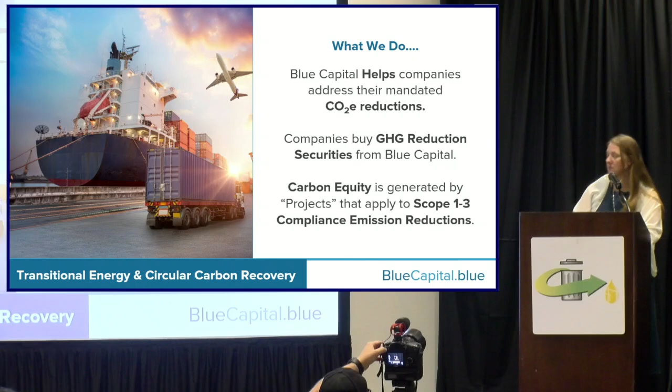So I wanted to start with an overview of the area. I wanted to talk about what is plastic circularity—it's when plastic products are renewed or regenerated, not wasted, so not going to landfill. And what is a circular plastic economy? Well, if a plastic product is used, recycled, or reused in a way that allows it to go back into a new life cycle or supply chain, once again, not into landfill or the ocean.

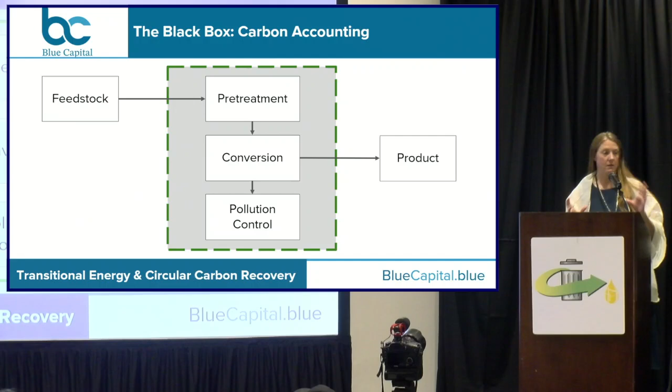And so what many of us—I've heard quite a lot—call the big black box that we talk about for carbon accounting or mass balance accounting. We have this overgeneralized simplicity that means we have a feedstock going in, a pretreatment system, conversion that creates a product, and some pollution control. But it's a very simplistic idea of what carbon accounting is and what circularity really means.

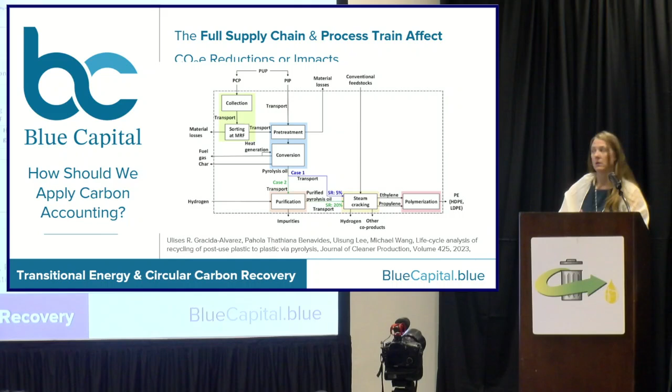So here's a paper that was put out in 2023, and I'm using it as an example of how, while you can make it less simplified, you still have an overarching problem of really addressing the industry as a whole. The reason is because every single LCA is different based on site, technology, process train, feedstock, and products coming out. It's all a different accounting system. So putting everything into a black box, or saying the industry makes this reduction as a whole, or this particular technology makes this reduction, makes no sense at all. We have to create authenticity in our accounting so that we don't misconstrue what the data is actually telling us.

So this is a very simplified example of this. If we take the initial idea of, how are we going to make decisions in developing our carbon accounting basis, we think about what products we'd like to have. We could have plastic as an end product, fuels, fuel additives, or electricity. Then we look at simplified steps of where we get our feedstock, what that feedstock is, how we're going to deal with it, and what conversion steps get us to the different products.

So just thinking about it from an energy in, energy out, mass balance approach. If we're looking at MSW, it takes a lot of sorting and stringent manufacturing to get that feedstock into a form usable by conversion technologies. So we see a lot of people using post-consumer industrial plastics, which is a really good fit for reducing some of that MSW conversion process.

In this model, your fuel additives, fuels, and plastics all need a recycling system, so they need an MRF. The reason is because to get to those products, they have very stringent restrictions—most need under 5% contamination on that feedstock. So there's a lot of work at the MRF to make sure the polymer you're working with has been sorted and cleaned appropriately for the process. It can't have salts on it, for instance.

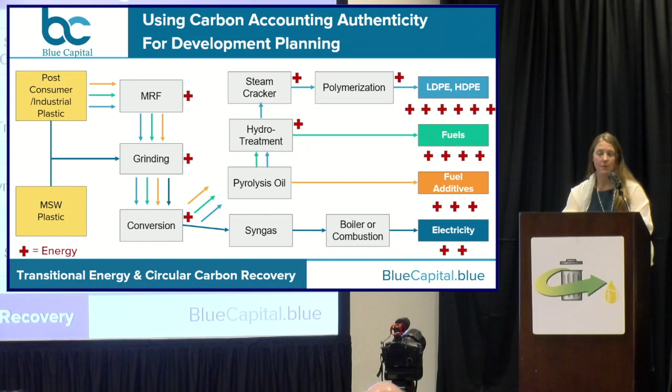So I take it from every step. You have your MRF, everybody has grinding that needs to happen in this scenario, conversion of some kind, whatever that conversion is. Then I looked at, just from your mass balance, very basic, what has the most energy going out and what has the least, and what's going to be your best return on investment from a mass balance energy perspective.

So creating authentic accounting, I think, can only happen through isolating mass balance carbon accounting for every step in your process, which includes waste input materials, feedstock import, end products, process train efficiencies, project site placement, embodied carbon, sustainable landscaping—which is often left out of the equation unless you're in California—and export of product.

So this is just an example of project infrastructure for a conversion system. Looking at it from a mass balance standpoint, looking at the energies going in, and the efficiencies that can go through the system. How do you create more energy inputs that have more sustainability impacts to them, like solar?

How do you use less on your utilities, like water, by putting in things like RO systems or other water recycling systems? How are you looking at air filtration and pollution control? All of these go into accounting mechanisms and should not be in a black box. All of these have value. Every single step of this has value.

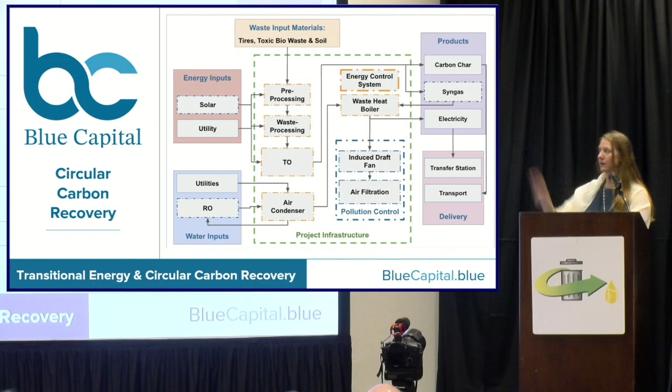So then we take a look at a project site, and we're like, okay, here's the project infrastructure. Well, what if we add into this living regenerative restoration, which is looking at your sustainable landscaping? You can once again add in solar into your landscaping, maybe put it over your parking areas, have water inputs and recycle that water, use salt-tolerant species, use phytoremediation if you have contamination on site. All of that living regeneration has accounting and methods to it that create credit value.

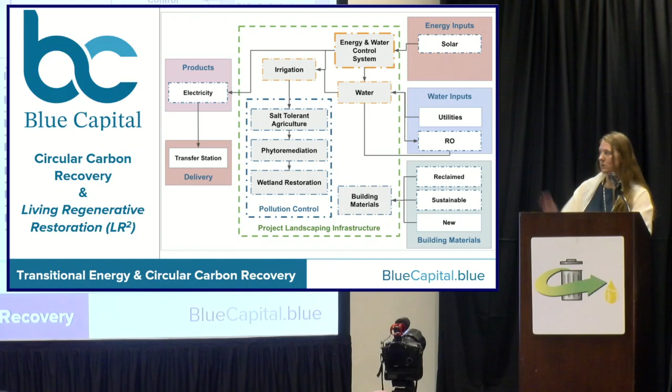Wetland restoration, the building materials that are going into your embodied carbon — are you using reclaimed, sustainable, or new building materials? This is the landscaping that goes with your internal infrastructure. Then, especially if you're in California, you have to think about embodied carbon of your industrial building.

So then we get into the real ins and outs of what's happening, from air filtration to how you're going to put in your vacuum systems to reduce any escaping dust particles, how you're going to use your energy and water control systems, and how you're going to use electronics and sophisticated methods to analyze and create efficiencies. Air circulation systems, and building materials again — reclaimed, sustainable, new. It all goes into these carbon accounting systems.

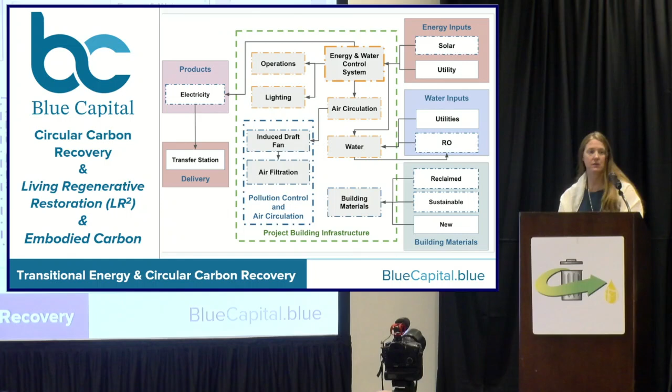And I don't expect all of you to read these, they're quite small diagrams, except to know there's a lot of steps that go into each piece of this. So why would we go through all that effort? Why would we think about all those steps? And why would we decide to really put the work into accounting methods that take every little piece of your development into account?

Well, the benefits are that if you are working with a European company, maybe you're working with Exxon or Shell that export products to Europe, they have European requirements for reduction they have to meet. Maybe you're shipping your product with another company — they have European requirements they have to meet for reduction. If you work with a public company, they have mandated SEC reporting requirements for their scope 1, 2 reductions.

You can generate and monetize your verified CO2e reductions. You can remediate toxic sites. So as a developer, you could buy a site that maybe is $20 million, or you could buy a site that's $2 million and has toxicity on it, but you're remediating the site, and you get a site for a lower value, and you're remediating it and getting credits for doing so.

So there's a lot of thought process that goes into your site certifications and developments. You create certifications for mandates, then required reporting. So we heard earlier about ISCC EU processes and how you're actually accounting for that. That's part of these certifications for the reporting mechanisms.

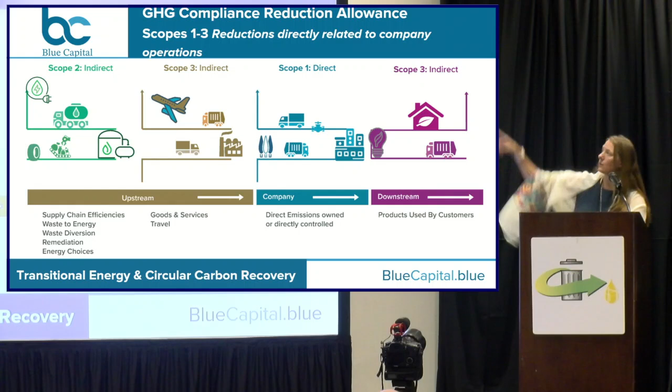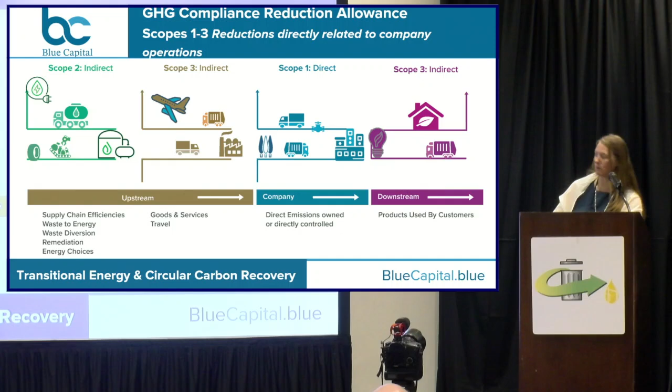So here's an example of a $100 million project that we're proposing with a securities investment at a port. This allows us to secure ourselves in the real estate of all the port residents—that could be Exxon, Maersk, or any of the large shipping corporations. We put in a waste-to-energy site, which is the anchor to the reduction mechanisms, and then additional remediation efforts we work on with organizations like University of San Diego to do nature-based accounting on the LCA reductions.

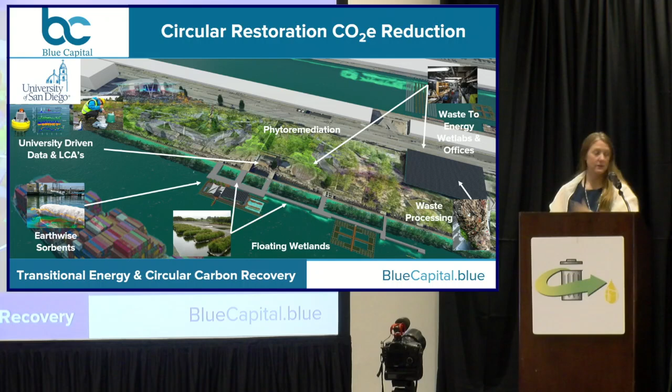So that's a holistic idea of how you can make form and function work to finance your projects. It works by us putting in a proposal for how to fit into a company's scope 1 and 2 reductions. We create and activate that project, get it third-party validated for carbon accounting and certifications with international accounting firms, and then the verified system goes into the ETS credit system where it can be traded. Through this, we generate a lot of blue jobs.

So why do we want to do this? We want to support transitional energy and circular carbon recovery businesses through this new type of financial mechanism, create clean energy resources, regenerate our resources, reduce dependency on fossil fuels, reduce global CO2e footprints, and create clean energy jobs while enhancing local economies. So, blue capitalization—a process designed to meet scope 1 to 3 greenhouse gas reduction compliance mandates through environmental and social governance validations backed by certifications.

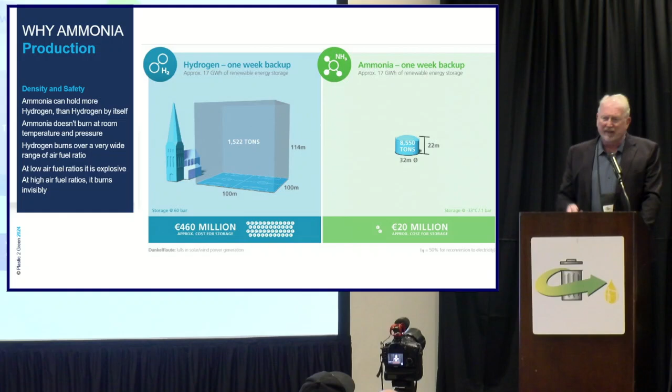So why ammonia from a marketing perspective? The ammonia market today is $80 billion. It's the third highest volume molecule that humans manufacture—basically, behind gasoline and diesel fuel, ammonia is the highest chemical production in the world. Without ammonia, we would only be able to feed 3 billion people on the planet, and everyone knows we're approaching 8 billion people, so ammonia is a critical resource.

But we believe the green ammonia that's going to fuel shipping and trucking and trains in the future, as the hydrogen fuel or zero carbon fuel of the future, that green ammonia market is growing very, very rapidly at 73% CAGR.

The real things happening in the industry: Toyota is actually developing engines to run on ammonia. There's a company we're working with called Amogy that is developing fuel cells to run on ammonia. So in the future, the hydrogen stored in the tank of the vehicle is going to be in the form of ammonia, and either in combustion engines or in fuel cells, that hydrogen energy will get utilized in the vehicle.

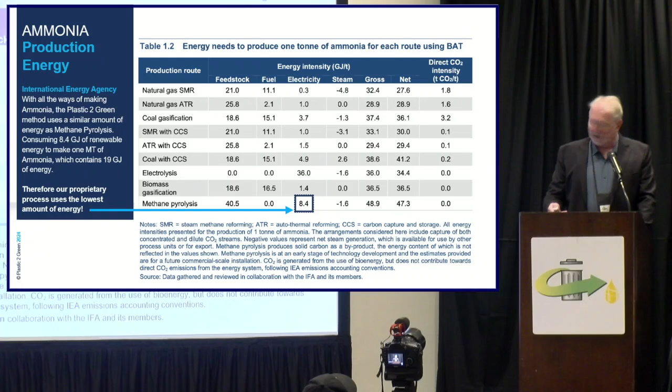So our technology, being a cousin process to methane pyrolysis, we're just doing ethylene pyrolysis and propylene pyrolysis. You can think of all the different plastics you know about, and we convert them to a gas. Once they're gasified, we process them the same way as methane pyrolysis and get 2.5 times the energy output as our energy input. As long as we drive that process with green electrons, we'll still have green ammonia.

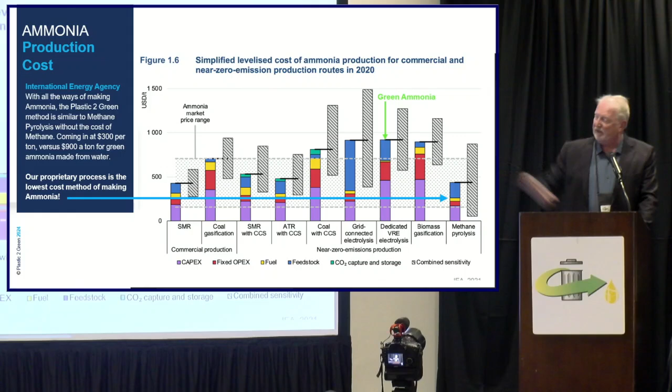If you look at methane pyrolysis minus the methane feedstock cost, basically we're taking everything that would otherwise be going to the dump, for which people pay tipping fees. A typical MRF still pays a significant amount of tipping fees for what they send to the dump, and we take all of that. Basically, we will have the lowest cost ammonia in the world using this process.

So what is the process? Basically, it's a front-end process that's used for medical waste destruction—everything that goes into a red bin in a hospital: syringes, blood, you name it, all the different types of plastic that are in the different tubes and syringes.

Basically, first they get cooked in a primary furnace up to enough temperature to gasify the plastics and take out the aluminums and the silicon in that first oven. Then the ash is taken out from all the paper waste. So if you think of a yogurt container with the yogurt still in it, the paper label around the outside, and the aluminum lid on top, we can take that entire yogurt container and everything else that gets shredded and put into the system.

So we have no sorting on our front end. We typically let the MRF do the sorting for us, but whatever they're sending to the landfill is what we typically take. Then the process in the middle, with the plasma, is identical to methane pyrolysis—it basically molecularly disassociates all the hydrocarbon gases and pulls them apart into hydrogen and carbon primarily.

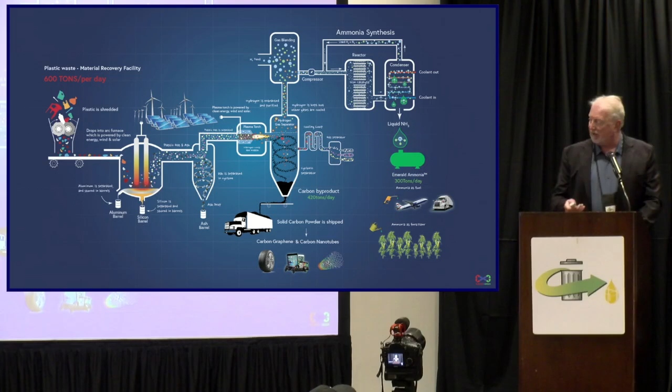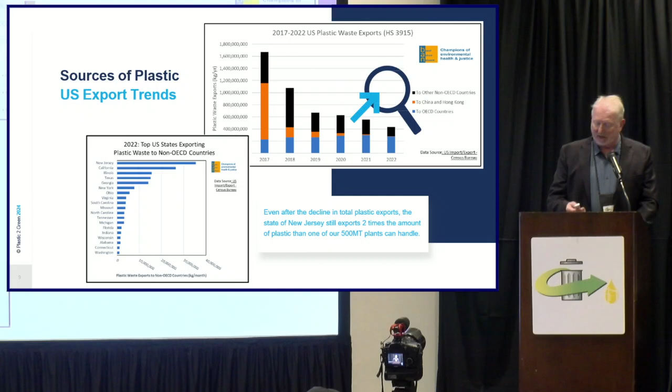So where's all this plastic coming from? Just counting what plastic is shipped overseas, New Jersey is the worst offender these days. It used to be California when things were going to China, but China stopped taking plastic in 2018. So there's all the missing plastic no longer going to China that's available to our process, as well as what's typically shipped overseas - we can prevent it from going overseas and take it for a lot less money, processing it into valuable fertilizer and hydrogen fuel.

Right now we're in the middle of building our mobile lab this year. We should be at TRL 6 by the end of the year, having demonstrated the process as a complete step all the way from waste plastic to ammonia. Then we'll be building a pilot plant over the next 2 years to take the technology to TRL level 8.

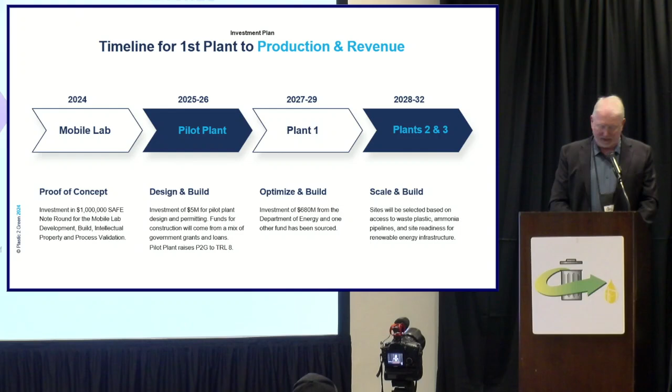At TRL level 8, we'll have access to the hydrogen loan program, called the Title 17 loan program from the Department of Energy, where we intend to borrow at a low interest rate $2 billion to build 3 plants. Plant 1, 2, and 3 will be built somewhere on the Hudson River, the Mississippi River, and the Bay of San Francisco, or somewhere along those lines, so we can get this technology rolled out, and then build a profitable company that will allow us to take this technology all over the world.

There's plastic waste everywhere in the world. We're one of the few processes that can take plastic directly out of the water, whether it's the ocean or a river. We'll be able to process that plastic directly and pull it out and put it into the system because our medical waste front end can handle water.

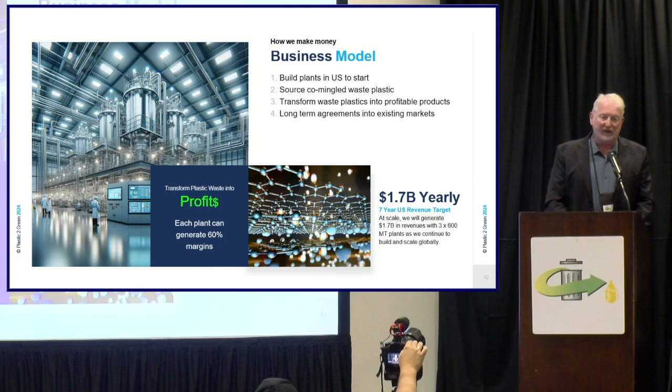So this is what a plant will look like. As an example, we'll be able to make a high amount of profits - $1.7 billion a year can be made from 3 plants by 2032. Look forward to your questions.

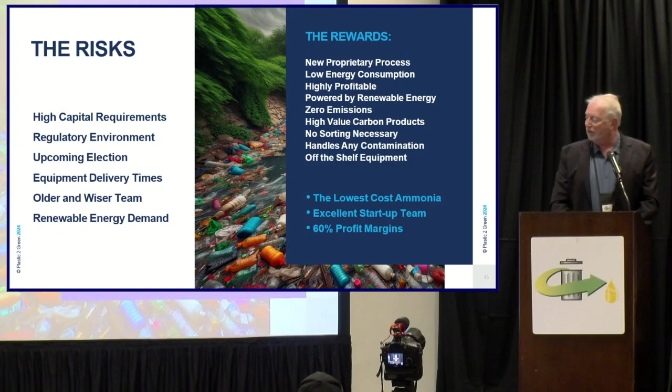These are just the risks of our company. Basically, we have high capital requirements, so the amount of money we need to raise is really the key. Fortunately, the Department of Energy has a huge loan program - we just have to get from here to there to qualify for that loan program. I look forward to your questions.

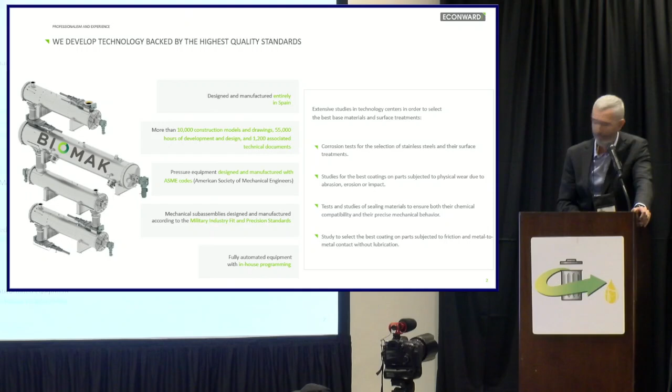I'm not going to make you— Richard told me earlier, don't put more than 30 words per slide. But I had already sent it, so it's too late. And then he also said, don't read from your slides.

If we look at the waste treatment systems currently available around the globe, we have landfills with or without landfill gas collection systems. We have incineration, very popular in countries like Japan or Indonesia. In the US we don't have MBTs, we have MRFs, materials recovery facilities. In other parts of the world, like Europe, MBTs, mechanical biological treatment plants, are very common. We also have a lot of anaerobic digestion in the United States, and of course wastewater treatment plants.

Now, what our technology does is add value to each one of these operations. What's not shown here is what's up and coming, like pyrolysis, gasification, and other technologies being developed to recycle plastics. Our objective has never been the recycling of plastics. Our objective is the recycling of organics. Our mission in life is to stop organics from going to landfills.

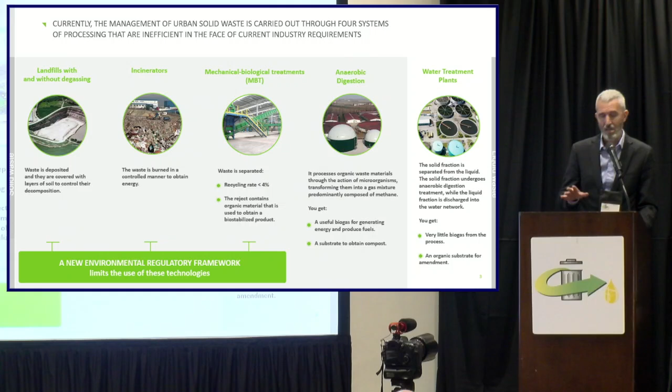The environment is very favorable. At the moment we are seeing a number of jurisdictions in the United States implementing organic waste diversion and source separation programs. That's happening not only in the United States, but worldwide. There are higher and higher targets for recycling of all types of materials, including organics, and targets for sourcing green energy in power stations, such as here in California.

As Andrea was mentioning earlier, the price of carbon is increasing because it's becoming more and more valuable. And there is a lot of capital—there is not a lack of capital for waste conversion and recycling. On the contrary, there is an increasing amount of available capital coming to this sector.

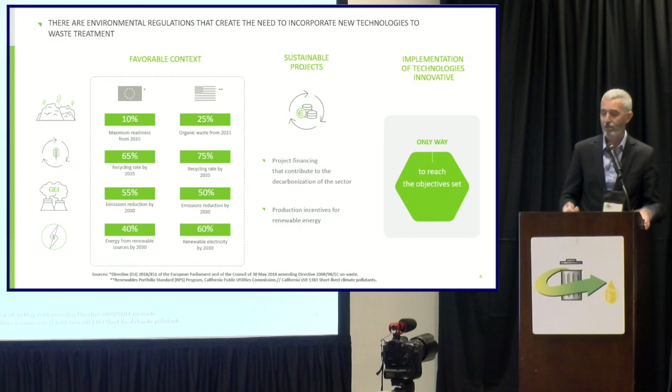What we are seeing now is all of these new technologies coming. Our technology complements every one of those classes of waste facilities. For example, for a landfill, if we could divert all of the organics, there wouldn't be any more methane emissions at landfills.

Imagine if we could implement a technology that separates your organics so you don't have to landfill them anymore. When it rains, the leachate would just be rain runoff, not a leachate full of chemicals that pollutes. If we remove the organics from landfills, we wouldn't have odors, and probably we wouldn't have landfills anymore. If you remove the organic fraction, what you get is an inert fraction that's perfect to use as a refuse-derived fuel or for recycling.

Attending this conference, a word I hear all the time is how heterogeneous MSW is. But that's the nature of MSW—it's by nature heterogeneous. Many of the challenges waste conversion technologies face are linked to this lack of homogeneity.

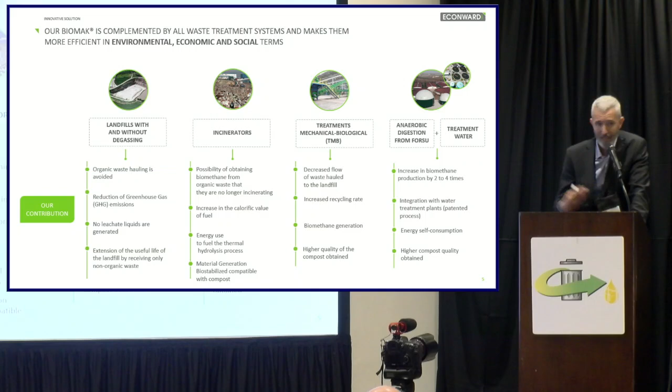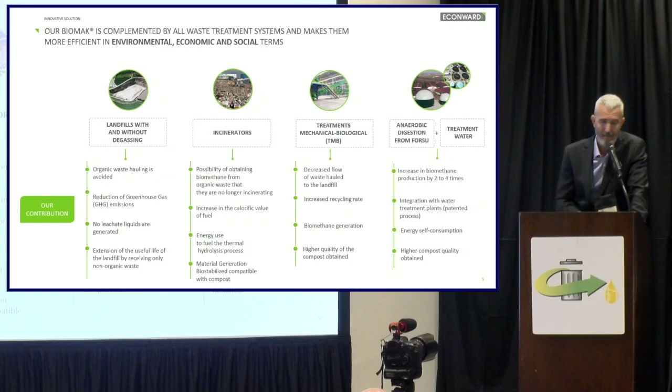For anaerobic digestion and wastewater treatment, there is a lot of value in the organics being hydrolyzed. Hydrolysis is a fancy word for cooked. A cooked potato is a hydrolyzed potato. Our process is very simple. We just steam, so we don't use liquid water. We use steam at very low pressure, between 3 and 4 bars, to hydrolyze the organic fraction, to degrade. Basically, we degrade what is biodegradable very quickly, and what is not biodegradable, like glass or plastic or metals, nothing happens to it. So that enables a very quick and easy separation.

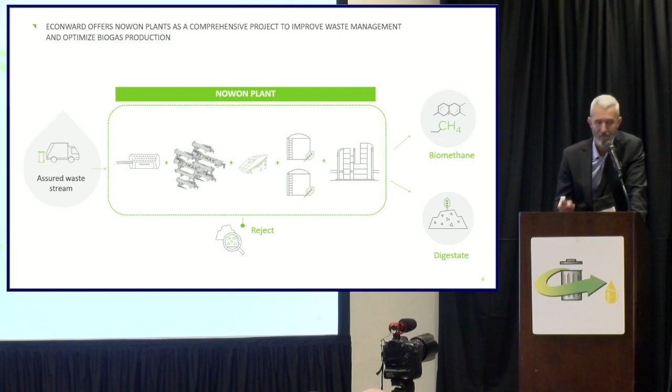That has in there a thermal hydrolysis system inside that Biomax equipment in the middle. All the rest, what you see before and after that box, is commercially available equipment. There are a lot of biogas plants, trommels, MRFs in the market right now. What we need is a functioning, reliable, financially feasible thermal hydrolysis system to link all of this existing infrastructure. We already have the infrastructure to capture organics and to stop sending organics to landfills. What is missing, the missing link, is this technology.

And now, one plant talking about CO2 sequestration and capture. When you think of diverting those 65,000 tons of waste per year, you end up with 73,000 tons of CO2 equivalent per year savings. So it's equivalent to the CO2 capture by 35,000 hectares of forest, that's like 80,000 acres of forest per machine. So these machines are by themselves an enormous decarbonization tool.

During the lifetime of each piece of equipment, it's over 1.5 million tons of CO2 equivalent.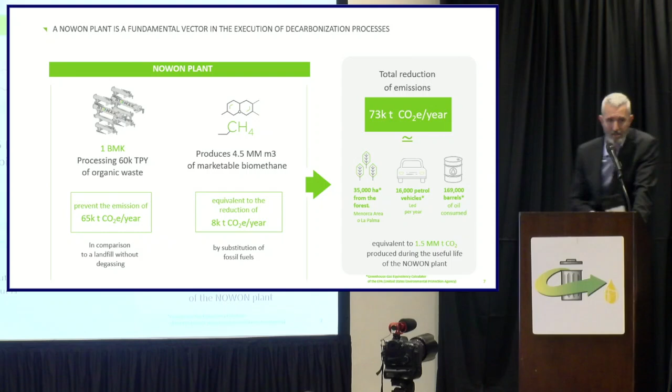We have based our many years of research in 3 main areas on making the mechanical components better, because one of the biggest problems for thermal hydrolysis was that autoclaves, these pressure vessels, will break. If you put waste inside a metal vessel and apply pressure, steam, there will be a lot of corrosion and erosion. Corrosion because of the composition of MSW, and erosion because of the impact of the metals, the glass, the sand, all of the solids that are in the solid waste.

So we apply a technology that is better understood. Think of factories that make nuclear submarines, machines that are supposed to be underwater for 30 years and not explode, not break. We follow the same principles.

We also did a lot of development on the application of thermal hydrolysis, to reduce the heat consumption. For instance, right now, per ton, our energy cost per ton is about $5 per ton. That's not talking about the cost of the technology, that's a different calculation, it's capex, et cetera, but it's a very effective pre-treatment method.

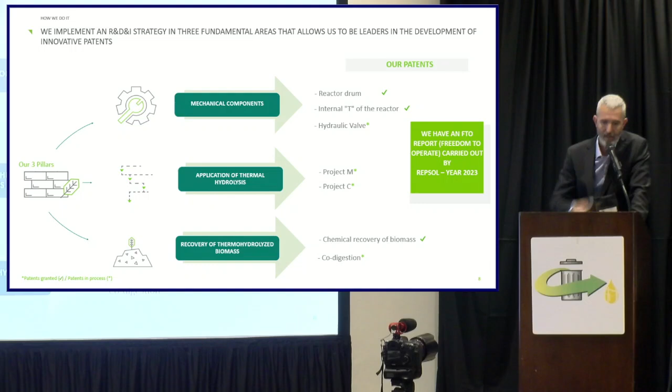We also focus on the applications of this technology, for instance for anaerobic digestion, where we have commercial operations now that are producing up to double the energy output that they had without thermal hydrolysis. That is because, in layman's terms, if you feed a baby raw food, you kill it. If you feed a baby cooked food, you help him grow. That is exactly what happens between hydrolysis and anaerobic digestion. It's just cooking the food for the anaerobic digestion bacteria.

We have a business model like everyone else. There is a huge opportunity. In the current market, we could install 2,000 of these machines and it wouldn't cover the existing market. And the market is increasing rapidly, and the same for the rest of the world.

About the technology, it's a technology that can be integrated into existing facilities. That's what we want. It's much easier to integrate into an existing facility than building from scratch.

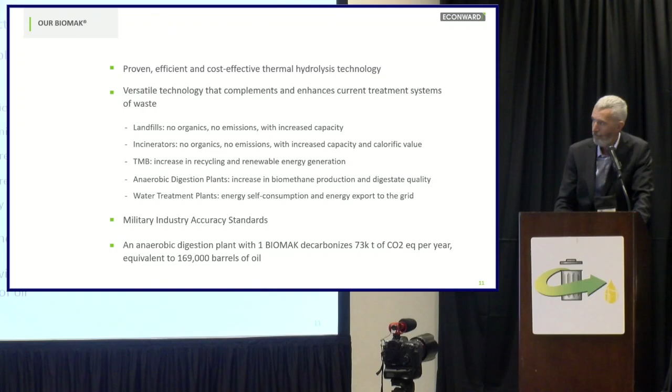Particularly, wastewater treatment plants in California could benefit a lot by enabling them to receive the organics that currently they cannot. There are a lot of opportunities in waste conversion as well.

And again, about the company, it has a unique technology that currently has no competitors in the market.